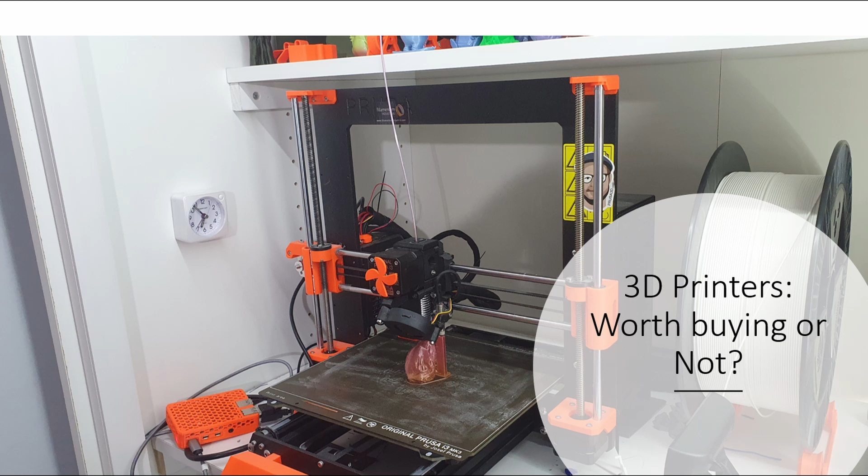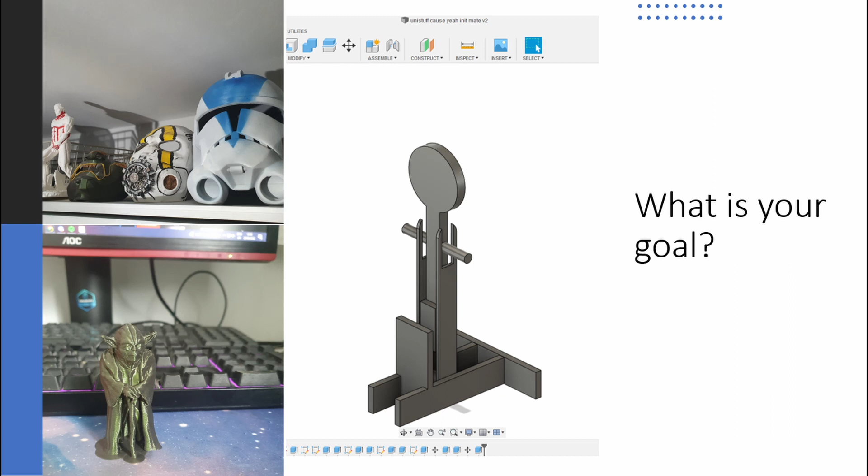Is a 3D printer worth buying in this day and age, especially now? Well, it depends. There are many pros and cons of having a 3D printer, but it all depends on what your goal with the machine is. Are you an engineer trying to make the next best thing? Or are you just a hobbyist trying to improve their craft and have a bit more fun? Or you could just be someone trying to make little cool things to share with friends and family. Let's dive in and see if a 3D printer works for you.

First off, what is a 3D printer? These are machines that use additive manufacturing to create a three-dimensional object. There are two different types of 3D printers: FDM and SLA. In this case, we'll talk about FDM printers, as they're most common on the market and easy to work with.

So, back to the main question, why should you want to buy a 3D printer? As I said at the start, you must think of a goal before investing your money into one of these machines, especially if you end up using it only once or twice then never using it again. Then you have a big paperweight lying around doing nothing. Well then, what can you do with these machines and why would you want to use one?

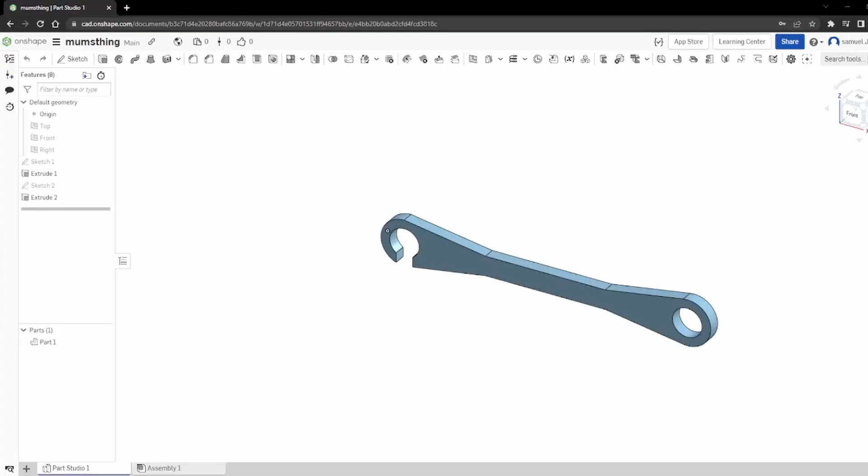They allow you to bring your own ideas to life. Whatever you want, you can design it, build it, and bring it to life using a 3D printer.

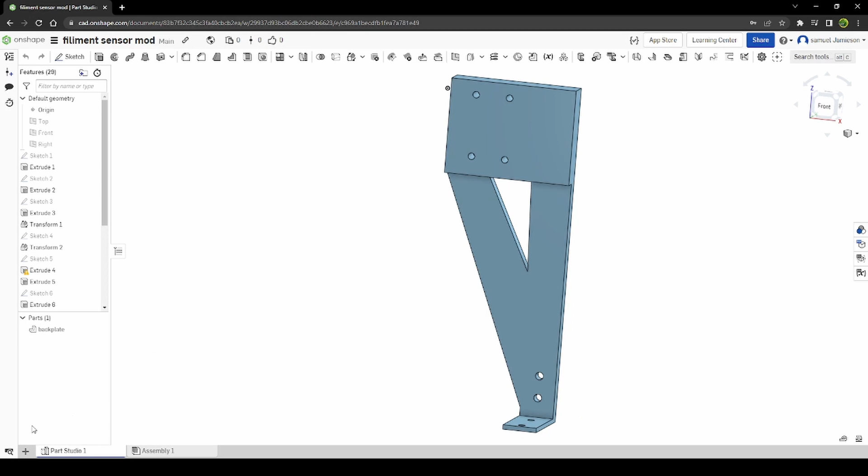If you're an engineer, 3D printers are great for prototyping. It allows you to quickly make a part, have it in your hand and see if it works. If it doesn't, it allows you to make changes to the part very quickly. This cuts down on the price of prototyping, as you don't have to go through big shops to get parts just to get an idea of what you're doing.

If you're a cosplayer, instead of spending hundreds or thousands of pounds on props, you can make them yourself at home at a fraction of the cost. These savings allow cosplayers to put more money towards other parts of the cosplay itself.

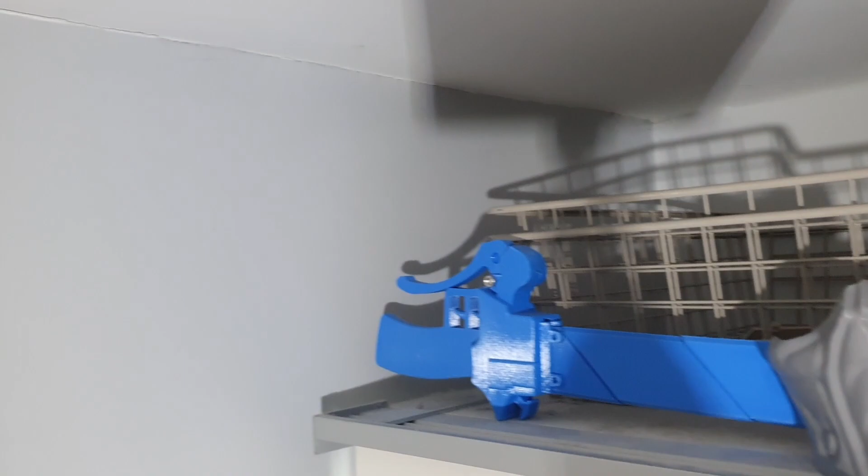There are many other hobbies that can benefit from 3D printing, such as D&D. You can make your own characters, dungeons, and props, all costing a fraction of the price compared to buying at retail, which costs a lot more.

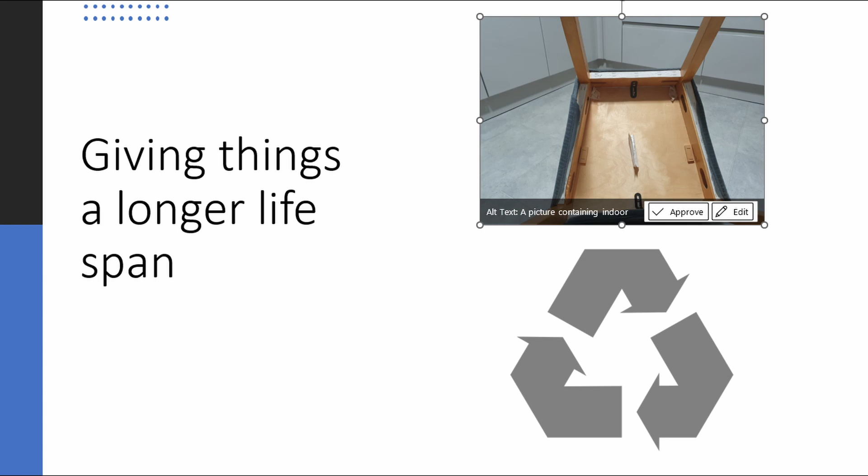But that's not all you can do with 3D printing. A 3D printer can help you cut down on waste around the house. For example, if parts around the house start breaking, a 3D printer allows you to design and make those parts. This improves the lifespan of the object as you keep fixing it with the 3D printer. For example, if a suitcase handle broke, you'd be able to design and fix that part, allowing the suitcase to have a longer lifespan instead of throwing it away as soon as it breaks. This keeps less things going into a landfill.

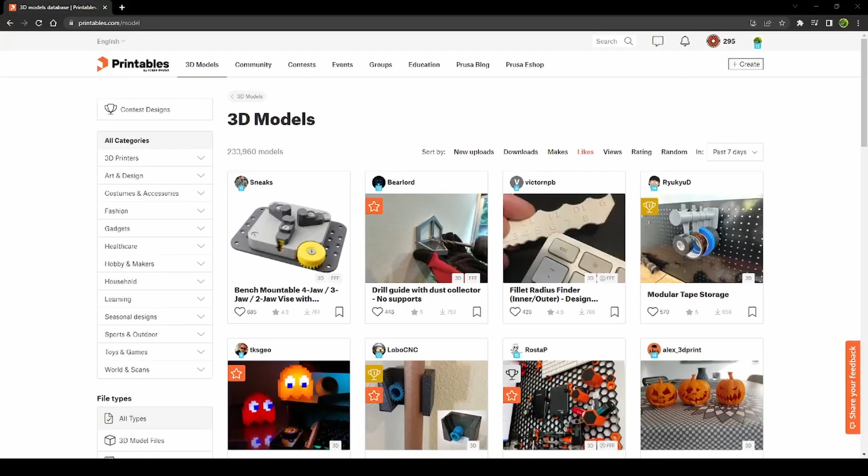However, when it comes to fixing things, you may have to design the parts yourself. If you can't find the part online, that means you have to design it. This may cause issues, as some people may not have the skills to use CAD software. However, if you're willing to learn, it may take some time, but there are plenty of tutorials out there to help you get into Fusion 360 or CAD software, so you'll be able to make your own practical 3D prints.

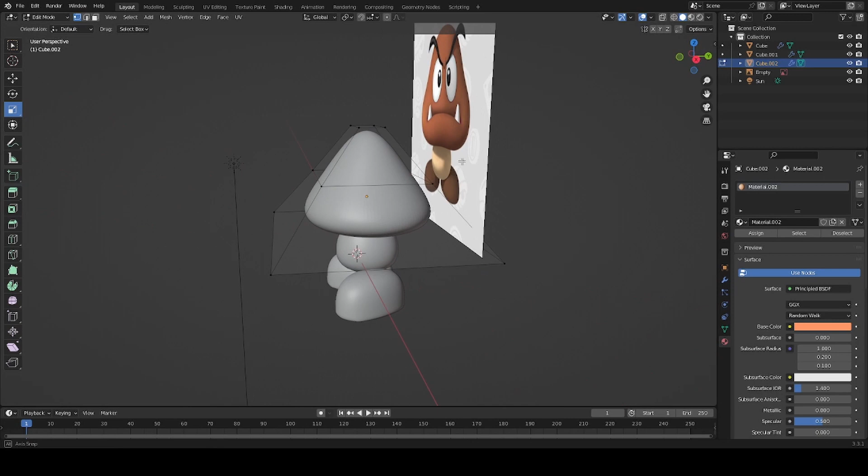But not everyone wants to make practical 3D prints - they may want more aesthetically pleasing prints. If that's the case, you'll want to learn Blender to make whatever you want. A lot of people who make their own designs using CAD or modeling software choose to share them with the public or sell them online.

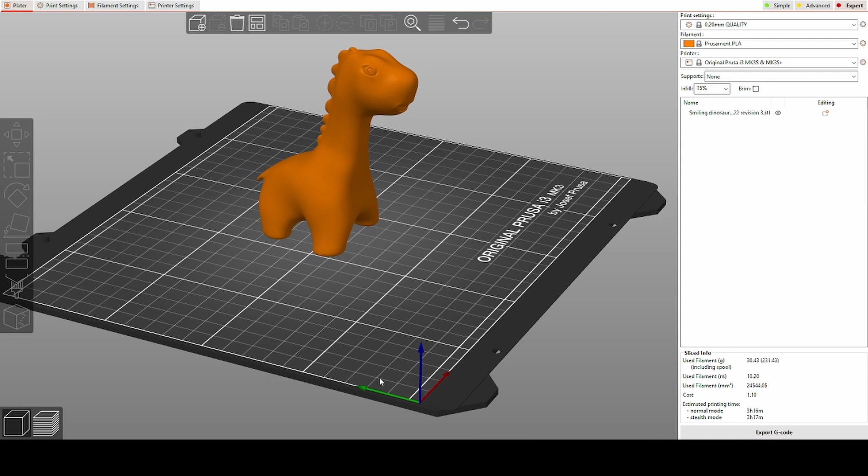You can do this yourself using services such as Etsy. With a service like Etsy, you have a platform to promote your products, making it easy to sell. The advantage of having a 3D printing business is that it allows you to print on demand - you don't need to hold any stock or inventory. It allows you to print whenever a sale comes in.

If you keep running your machine constantly, printing and printing, you have to think about how much material you're using and how much that's costing you, as well as how much it costs to power the machine the entire time. In Europe, power prices have gone up, so you'll want to be careful with your cost of living.

As well, with the printer being in use constantly, there's more chance of it having issues or more wear and tear on the machine itself. If you got a machine such as the Prusa and built it yourself, you may be able to fix these problems quite easily, as you have a basic understanding of how to build and take apart the machine.

However, some printers, like the Ender 3, come pre-built. This means you lose out on understanding where parts of the printer go if anything falls apart or needs fixing. Luckily, in the 3D printing community, if there's any problem with your printer, you're most likely not alone, as most people around the world with 3D printers will probably ask the same questions. So if you get stuck, there are plenty of sources around for you to get help from.

Well, in conclusion, should you get a 3D printer? Well, yes and no, really. It all comes down to whether it fits your needs and whether you'll get your money's worth out of the machine. If a 3D printer fits your needs and you think you'll get your money's worth, then go ahead and make the investment. However, if you don't think it'll fit your needs and you won't get your money's worth, then I don't think you'll want to waste your money just to have a few printed things laying around the house. But at the end of the day, it's your decision.